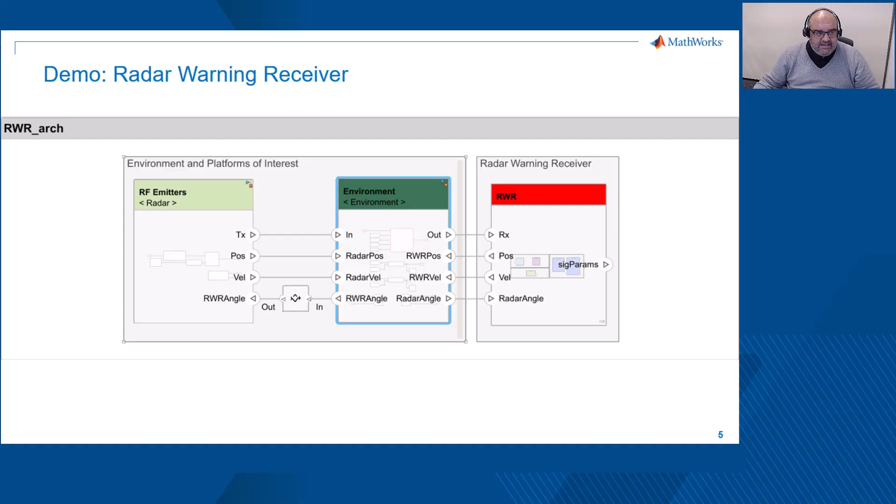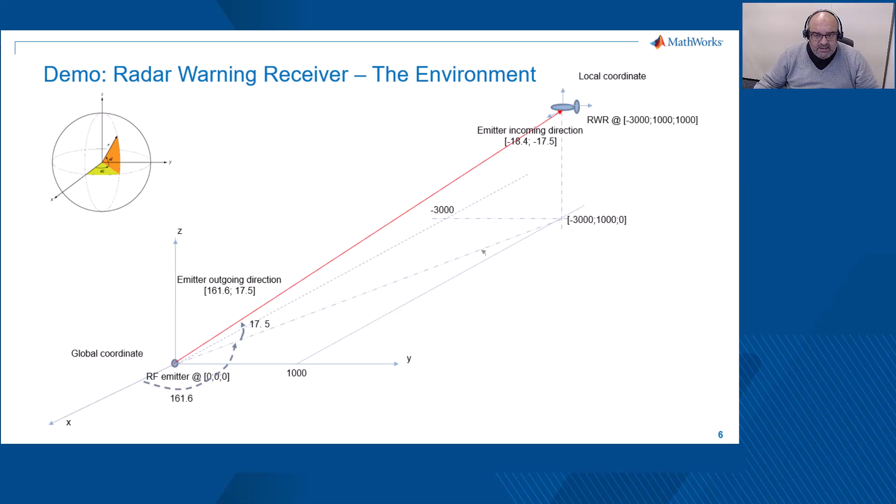As mentioned before, the radar warning receiver is located in a flying platform at an altitude of 1000 meters, located 3000 meters away in the x direction, 1000 meters in altitude, and 1000 in the y direction. Therefore, the relative azimuth and elevation angles in the initial position between the radar and the warning receiver are minus 18.4 and minus 17.5 respectively, and the distance is approximately 3,317 meters.

On the other hand, the radar warning receiver is made up of a receive array formed by a uniform rectangular array of 10 by 10 isotropic antennas, separated by half of lambda. The RF front end in our design just specifies that the noise level of this receiver is 2.5 microwatts.

The motion of the radar warning receiver, which moves only in the x direction, has a velocity of 200 meters per second. And again, the initial position is the aforementioned 3000 meters in the x dimension, 1000 meters in elevation, and 1000 meters in the y dimension.

The signal processor is in charge of two functions. First, it detects if there is any signal in the spectrum recorded by the system, which is done by making some subbands, and then the system detects if there are signals and also in which subband. At the same time, the signal processor estimates the direction of arrival, meaning it estimates in which direction the radar is located.

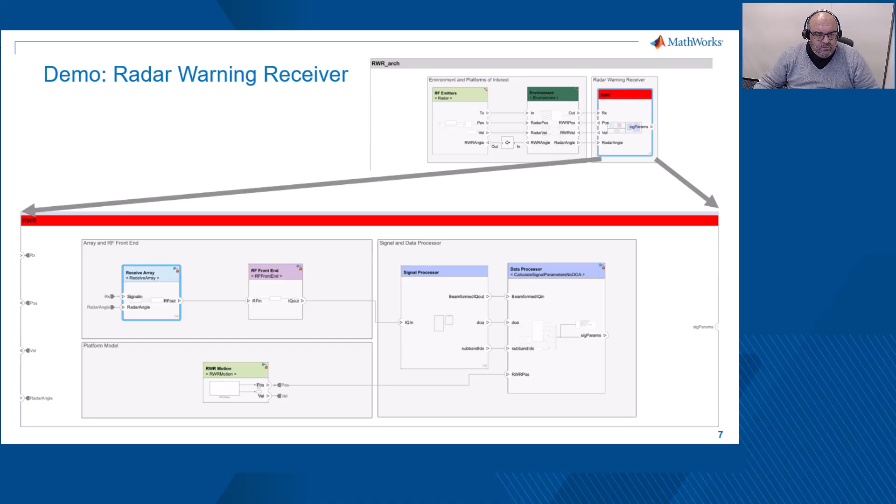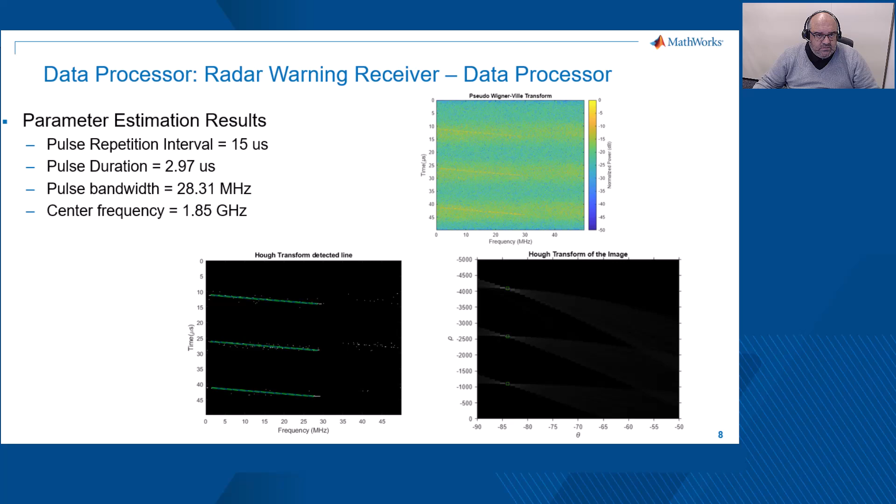But now that we have seen the architecture of the example and how it works, let's see where we are here. Now let's go to the second part of the model, which is called the RF emitters. It is important to emphasize that the radar warning receiver commonly is passive. It's not emitting any kind of electromagnetic signal that could interfere or hamper the detection of the radar warning receiver. Therefore, the RF emitters mean all the active systems which could be working in our environment.

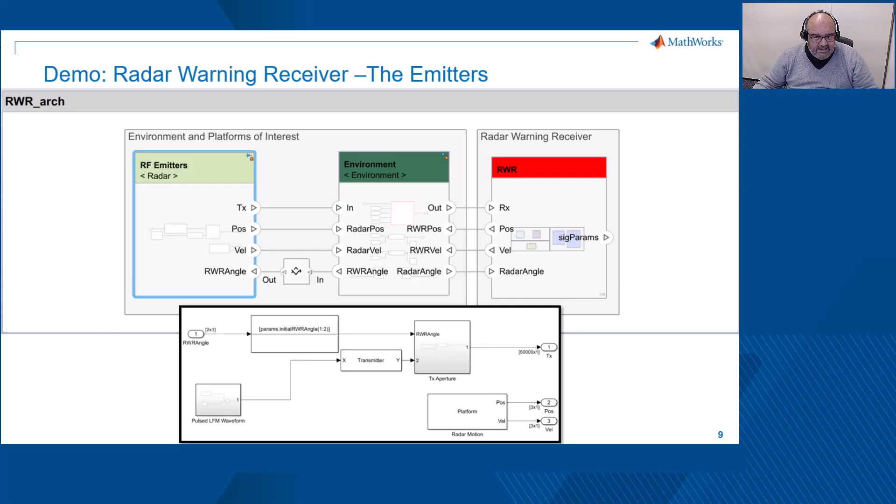In our example it is the pulse LFM radar, whose location is fixed at 0,0,0 and that we are trying to detect. It is convenient to emphasize that, similar to the radar warning receiver, the radar that we are modeling also has a transmitter, which by definition is a simple gain block of 5 dB, and the transmitting array, which is supposed to be a uniform rectangular array of 8 by 8 isotropic elements separated by half lambda between them. Till this moment, all that we have seen is the model of our radar warning receiver system, together with the environment and our radar system trying to detect the flying platform.

Everything is inside of our tool called Simulink, which I would like to explain to all my customers is the glue that allows all the others to be simulated and to be together, sharing info and making simulations of the end-to-end system. It is in this environment in Simulink that you can simulate your system before moving to hardware, optimizing the design and resources even before having to buy a simple cable.

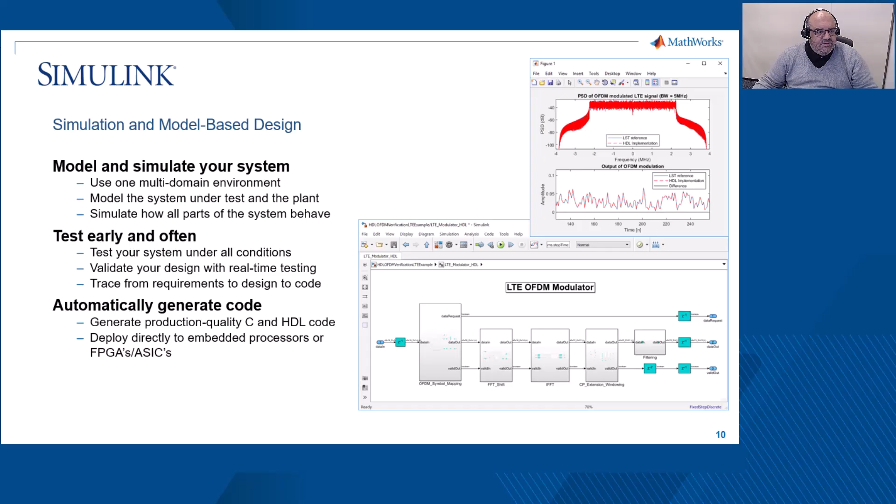My advice is to explore and implement a lot in this environment. Even try designs that you wouldn't otherwise consider, all without having to buy anything, or write any single line of C, C++ code or HDL code, and just gain all the insights that you can from your system.

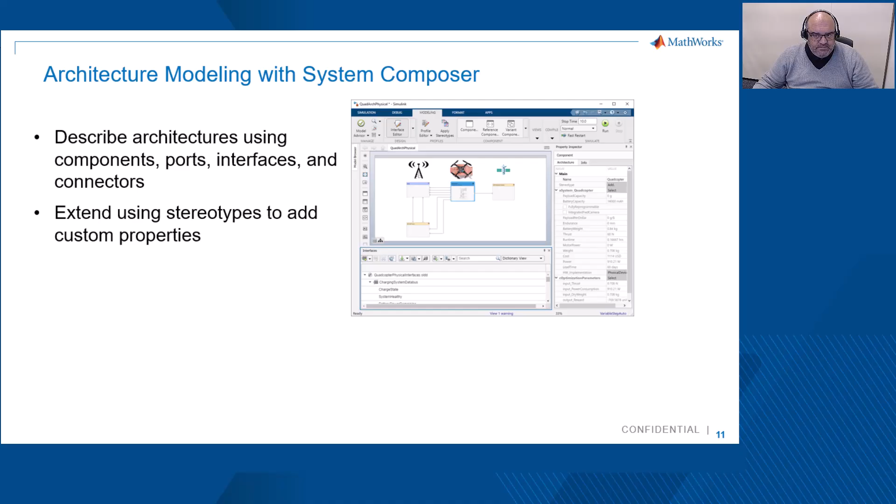On top of the Simulink environment, what we have used to model the architecture is the System Composer tool. You can describe how your system is built up by components and their interconnections through ports, interfaces, and connectors. Moreover, you can also unveil advanced functionalities like advanced views or filter components by defining stereotypes.

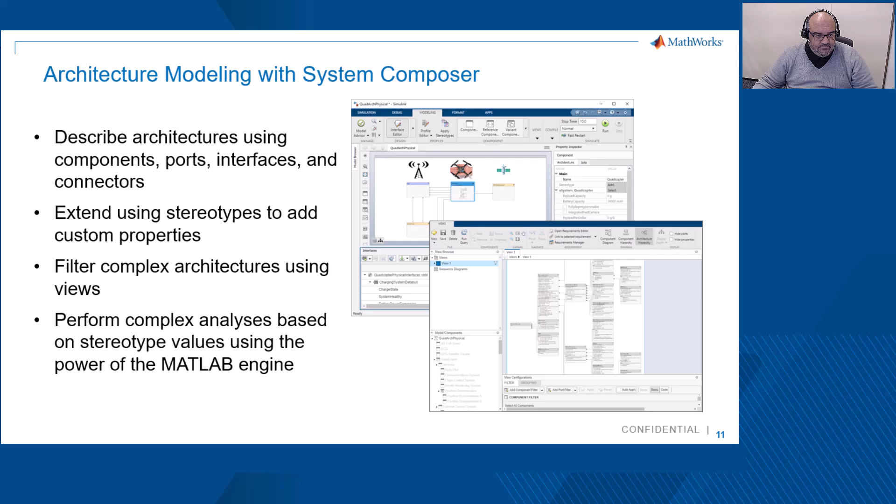We have seen now the architecture and the design, but commonly, the first step of any project is the requirements. What happens with the requirements? Here we do have the requirements in our structure.

Requirements typically come from tools like Word, Excel, or more specialized requirements management environments like DOORS or Polarion, for example. Implementing these requirements in model-based design could be tiring using different environments for each part of the project. To work with the requirements directly in Simulink, there is an import operation from Word, Excel, DOORS, and also for

the standard ReqIF, which is the Requirements Interchange Format, which are XML files. This one is supported by most of the requirements management tools. If the requirements change at source, an update operation synchronizes the changes.

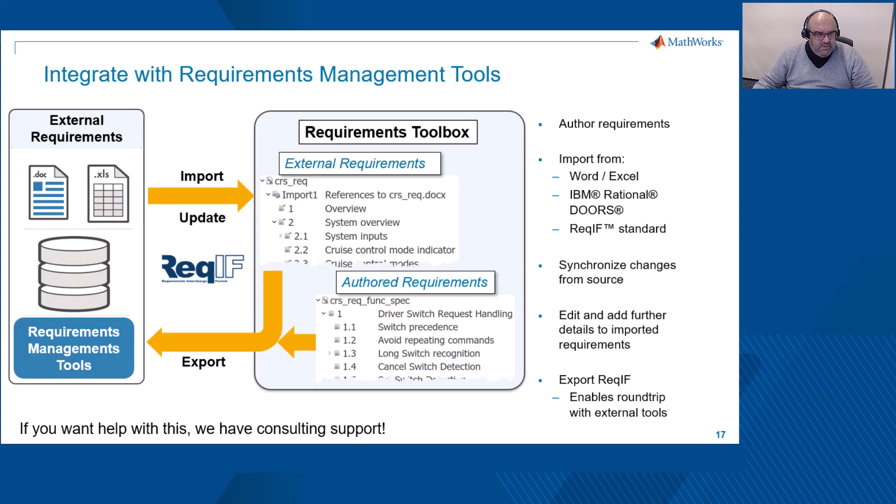Usually the default is to treat the external requirements as read-only, but we can also modify the requirements or add more details, for example custom attributes, and then re-export. In addition to requirements imported from outside, you can also create requirements in Simulink. And finally, as I said before, export the requirements via the ReqIF standard. Let's have a look at the video demonstration about how this is done.

So here, the first thing is that we will open the System Composer app. When we open System Composer, first is to arrange the windows in the way that we want and feel comfortable. It's absolutely personal what windows you would like to see and how. You can just arrange them the way that you like. Once you have the display set up, start creating the blocks.

Creating the blocks, putting the names, and creating all the ones that you would like for our system. In this case, we are seeing a video of a possible radar system that could be used in our environment. There are different parts created, like power, radar, targets and environment, and also comms link and command center. Each of them has its own functionality, and they will have their own properties, their own connectors, inputs and outputs.

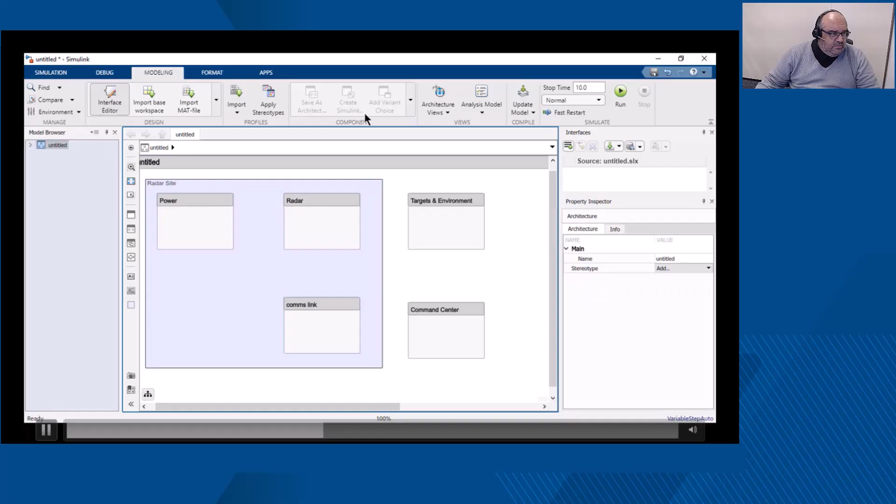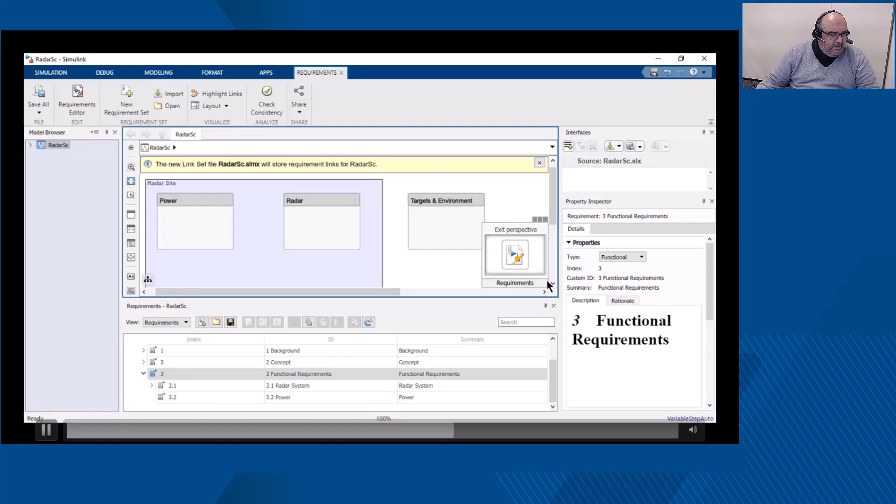Here we are also creating areas in which we can engulf parts, and then we are going to link the requirements to specific blocks of this System Composer creation. We have selected the Word document in which the requirements are specified. Here we are linking to that one, and we have the list of the requirements. We could go one by one, or in our case, we will select some of them to be joined directly to specific blocks.

For example, for the power, we have the 3.2 requirement. Then we link directly to the power block. And then we have the possibility to show it, to see what the requirement is. And we will see later how to link to tests. In this way, we can link all the rest of the requirements. It could be environmental, linked to target and environment. It could also be functional, like the radar system, in which we specify the maximum unambiguous range. That can be linked to a specific part inside the radar, or also to other blocks like targets and environment.

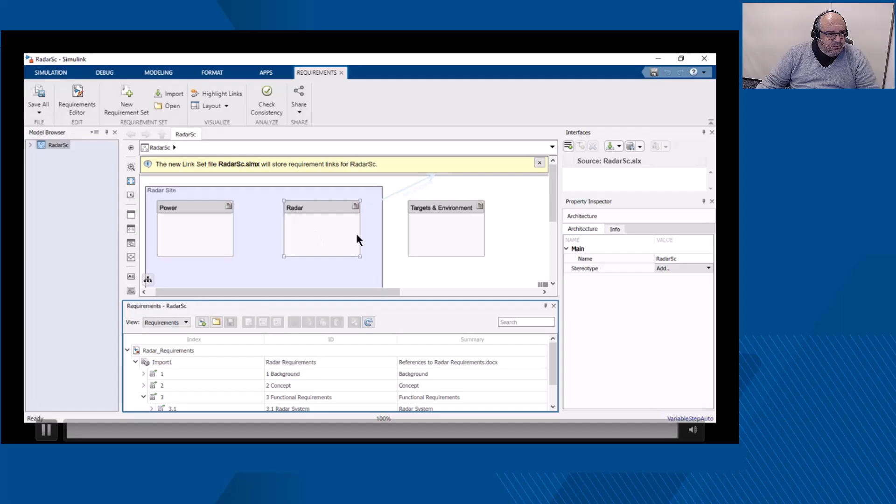The most important thing here is that we are linking the requirements directly to the specific blocks and to a specific design, because as we will see later, inside these blocks we will have the models that each person of the team will populate. What I mean is that inside the radar block we will have a transmit array, we will have a receiver chain, and those will be populated by the person or teams in charge of each part.

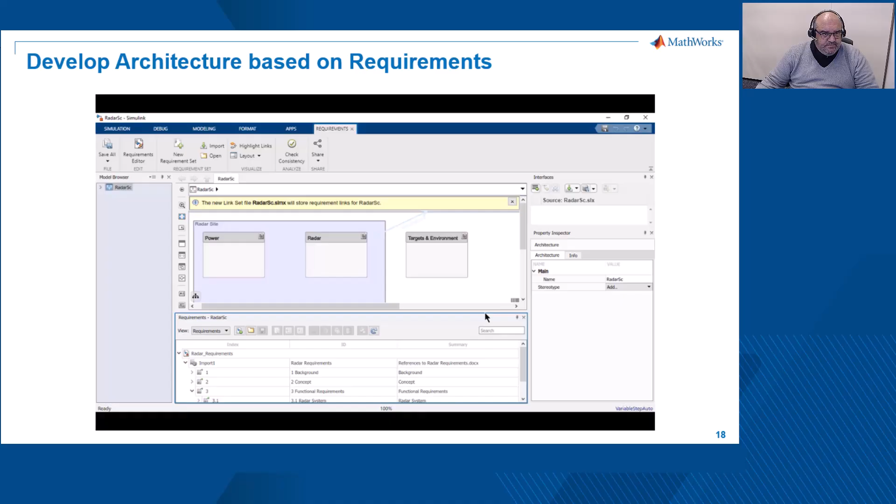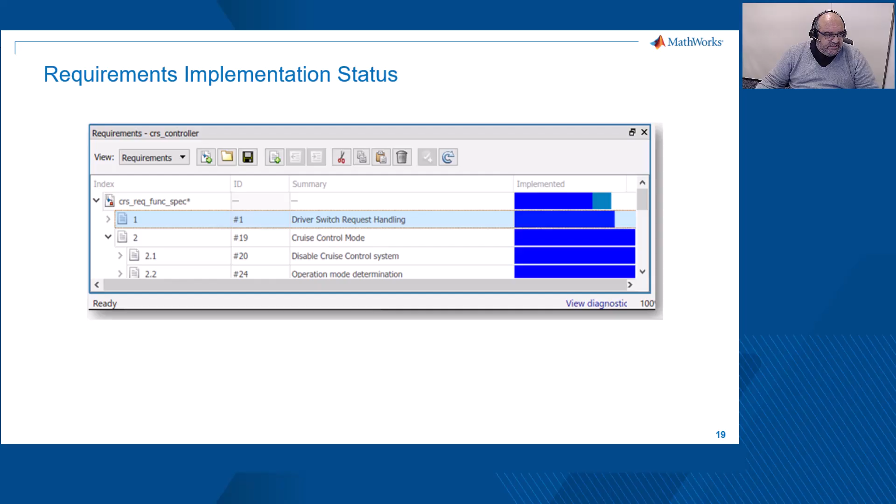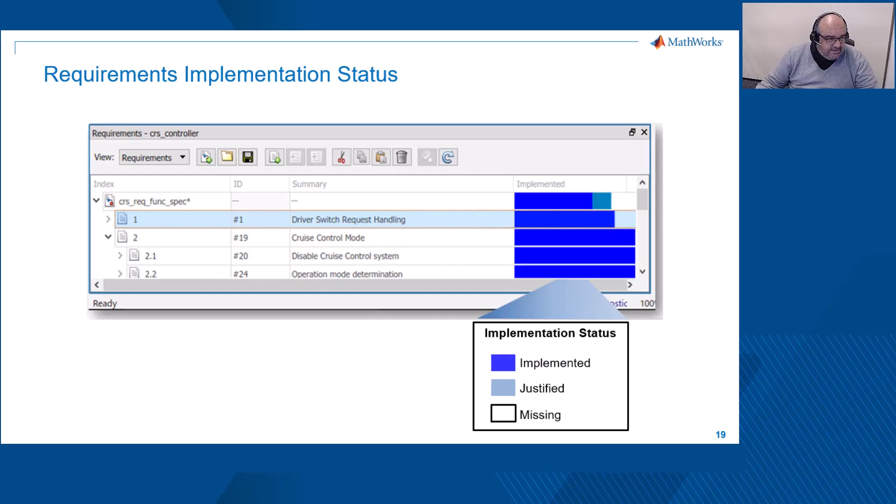Moreover, once we have done the requirements, we have the possibility to check the implementation status. What does it mean? It means that we can check visually, as we see in the image on the slide, for each of them whether they are implemented, justified, or missing. Missing means that they are not linked to any part of the System Composer model. Implemented if they are linked and also simulated, and justified if they are linked but not simulated.

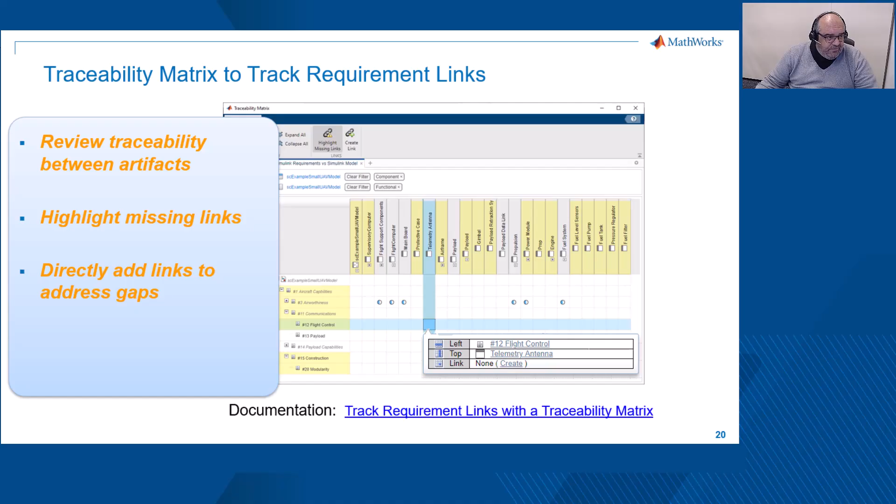Therefore, we can, for example, highlight missing links, such as a missing link between requirements and functional models. Directly with this, we can add links, address gaps very easily, and inform the person who should manage or fulfill those gaps.

At the same time, these matrices can be enormously big, formed of hundreds or even thousands of requirements, and as big as hundreds of thousands of models. Therefore, this matrix view can also be filtered to manage large sets of these elements when you have to manage many of them.

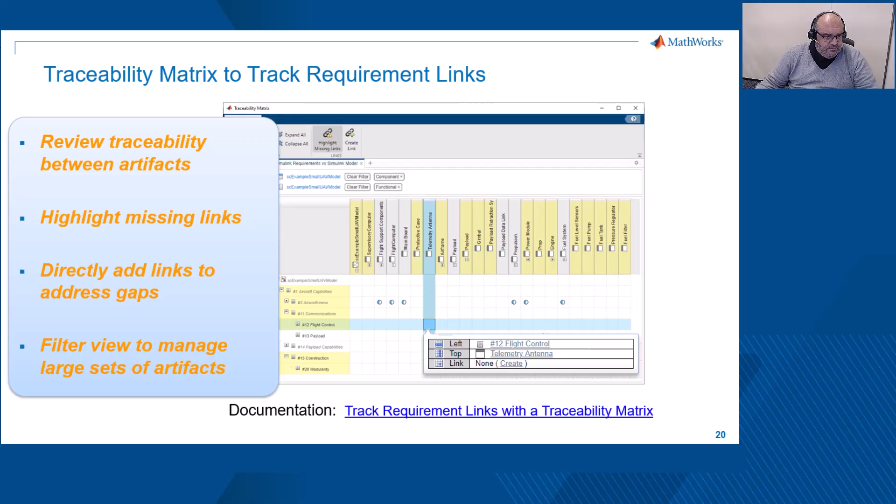But now, we have seen before the requirements, the functionality, the architecture and the design. But let me come back, and I would like to go slightly more in detail to highlight that there are several tools that can be used in our example to do the design process. Again, I would like to emphasize that the design phase means that we will populate each of the blocks of the System Composer model. That is what we can do during this design phase with modeling and simulation.

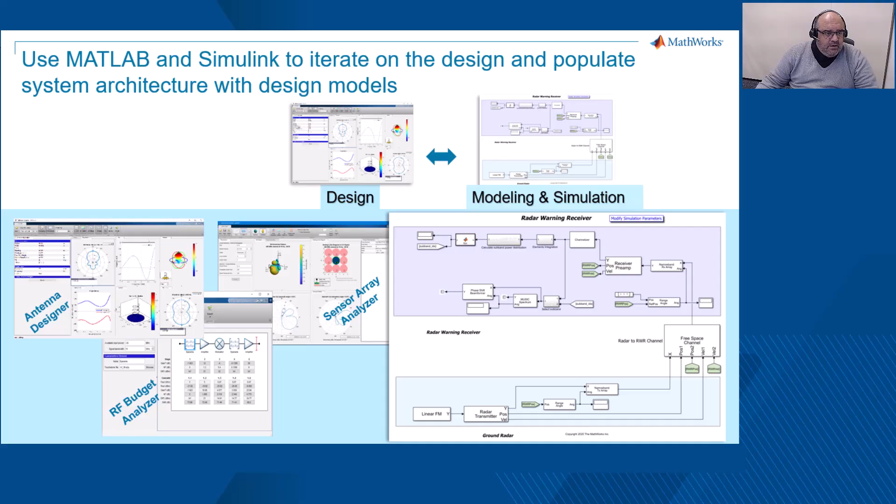But again, for doing that, we have many tools, and we are going to explain some of them right now, how they can be interconnected and how they can be used in order to populate those models in a very simple, straightforward workflow. What we are going to do right now is see a video of how to produce those specific models. In our case, we will start using the RF Budget Analyzer app. This tool is intended for simulating cascades of RF chains.

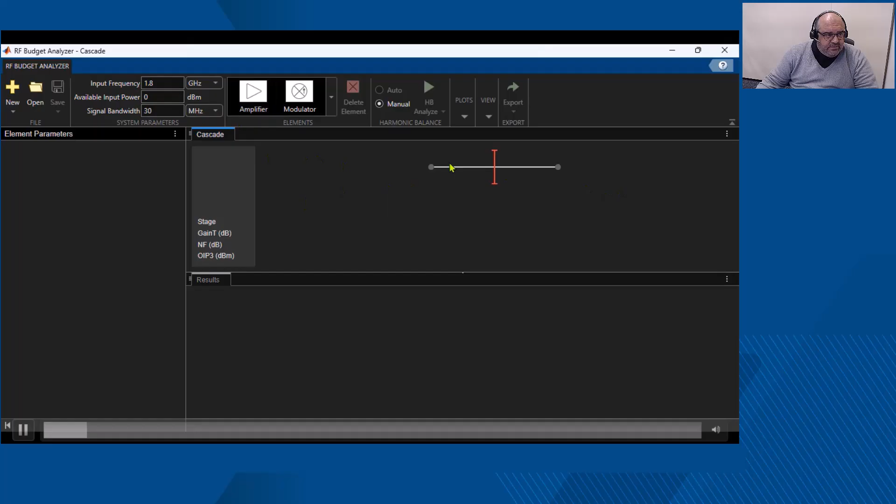The first part of the simulation is we go to the system parameters section in the upper left, in which you have to define the input frequency, the available input power, and the signal bandwidth. Because we are trying to replicate the transmitter of the radar, the input frequency will be 1.8 gigahertz. For the available input power, let's assume we have the modulated signal with a power of 0 dBm, and the signal bandwidth, as we have specified, is 30 megahertz.

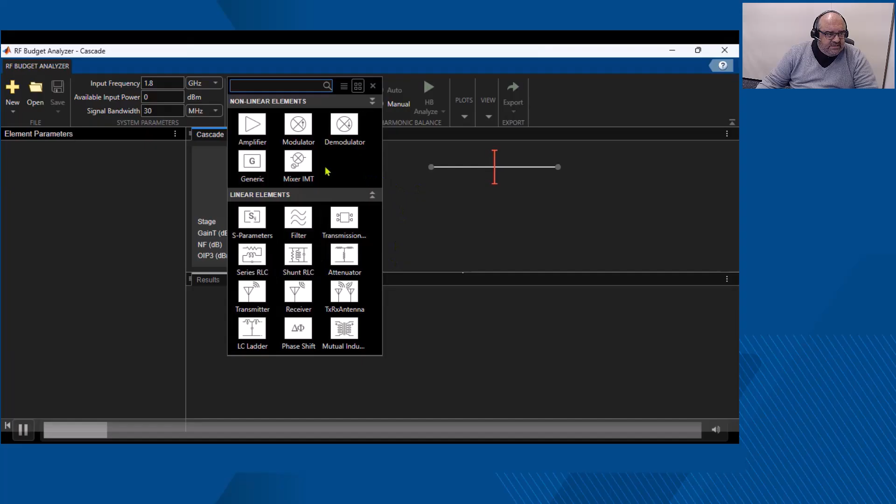Then we can populate the system with different blocks. The blocks that we can insert, as you see here, are nonlinear elements like amplifiers and mixers, and linear elements like filters, transmitters, or antennas, or even S-parameter blocks. In our case, we are going to start with a simple filter after the signal generation. Better, to also include the mixer in our design, we set the input frequency so that we generate the signal in baseband. So instead of 1.8 gigahertz it is 0, the initial modulation.

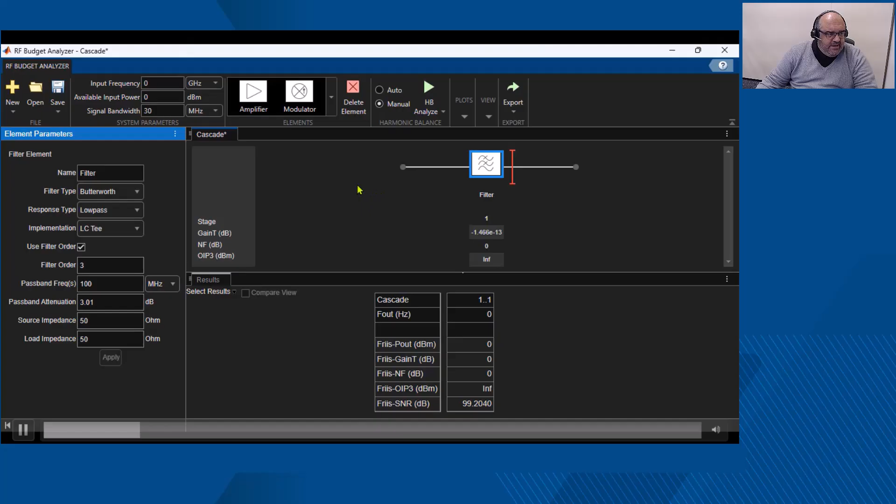Then the filter: for each of the blocks, when it's selected, you have on the left part the parameters of the element. For the filter, the filter type is Butterworth, it's a low pass, with an LC Tee implementation structure of order 3. Let's assume the passband frequency is 100 megahertz. We make the passband attenuation 3 dB, and then we have already designed the filter, and it's included. The second element is going to be an amplifier.

Let's assume the available power gain is 7.5 dB, and that's done for the amplifier. The third element of our cascade after the amplifier is to go up in frequency, the up modulator. We assume it has losses and is not active, so we put minus 6 dB, or 6 dB of losses. More important is the LO frequency: because we start at 0 and we want to transmit at 1.8 gigahertz, the local oscillator will be at 1.8 gigahertz. The converter type is up, and the input and output impedances are 50 ohms.

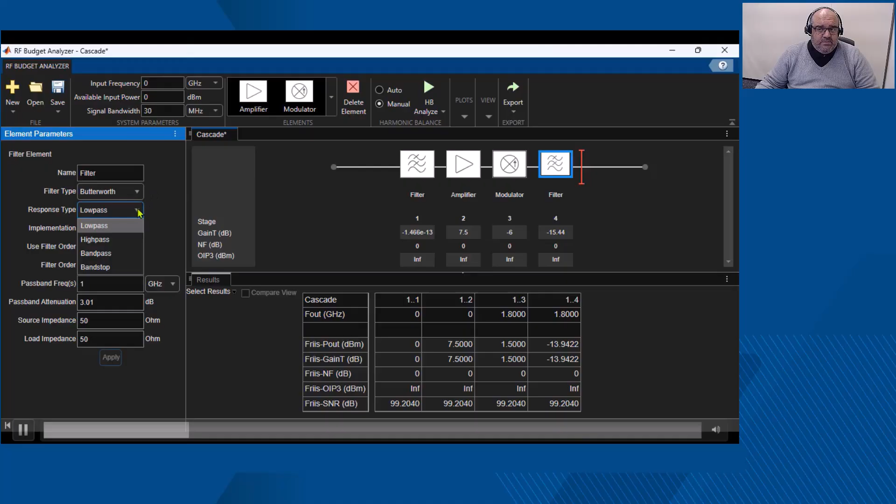After a mixer, generally speaking, we have to first put a filter. Why? To filter out all the possible spurious signals that the system could generate. Right now our filter is a bandpass filter, because we are already at 1.8 gigas, and therefore we specify the passband frequencies at 1 and 3 with an attenuation of 3 dB. So it's not very selective, but at least it's the first filter after the mixer.

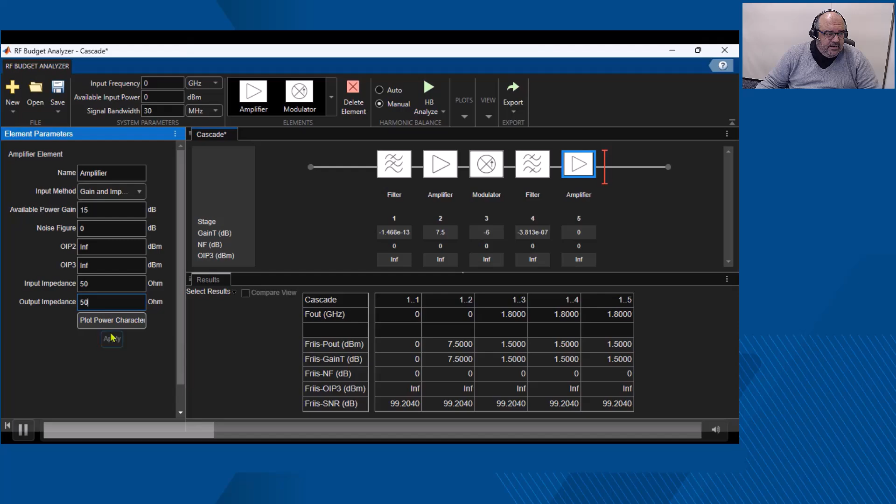We can put a second amplifier with partial gain or medium gain of 15 dBs. Then after that, another filter, and right now we can go very selective in frequency. What I commonly do is a bandpass of a higher order, and therefore try to be more selective. Although here I am selecting the same passband frequencies, commonly here we can be much narrower.

And then finally the final power amplifier, which would be one amplifier that has very high output power capabilities with a reduced available power gain, commonly right now 7.5 dBs. With that, we have all our transmitter chain for the radar, and we have the results there. The total output power right now is 24 dBm of transmitted power calculated by Friis, and the output frequency is 1.8. Those would be the capabilities of our transmitter that we could specify for our environment and our system.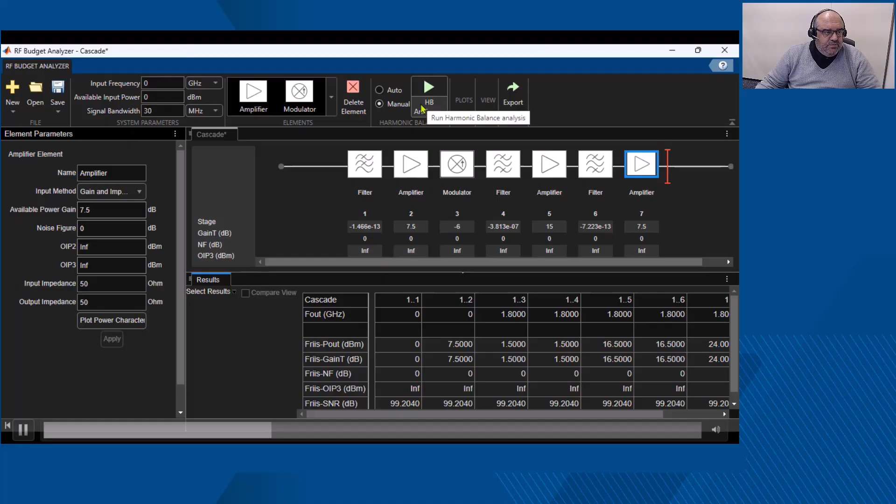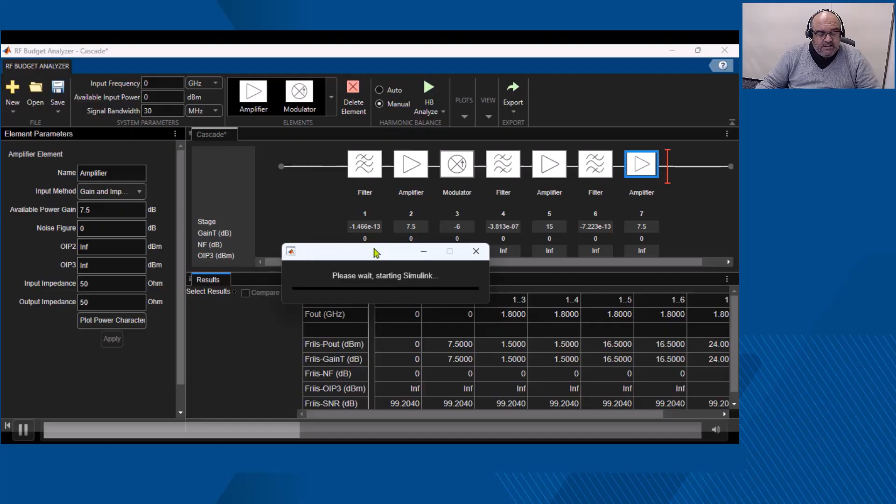It's also important to mention that we can calculate the results not only by Friis equations but also by harmonic balance. And finally, the most important part is the export tab. In the export tab, we can select one of the options, that is RF Blockset. When we select that, the system automatically opens Simulink, and it will create for us directly from this cascade design the Simulink equivalent model of this transmitter. And that is very, very important because it gives you a lot of things already done.

Here you can see the block for you. You have all the blocks there with all the info that comes from the RF Budget app, but also the configuration of the simulations, the input ports and the output ports, which is also very important to have already configured for you directly, because if not, it adds complexity and difficulty for simulating the models.

But in this model, there is something missing: the antenna. We can open an antenna block by requesting antenna from the canvas, and the only thing we have to do to include the antenna is to connect the output of the power amplifier to the RF input of our antenna block. That would be enough to include the antenna in our simulation environment. But what kind of antenna? Right now, by default, it is an isotropic radiator.

There are possibilities to make much more complicated antennas, not only specifying the gain here, but also the frequency radiated. There are tools to make the design of antennas much more elaborate. What we're going to see right now is designing one from the Antenna Designer. Directly from the source of the antenna model, we select Antenna Designer and press the Create Antenna button. This will open an app very similar in appearance to the RF Budget app, in which we can start designing our antenna.

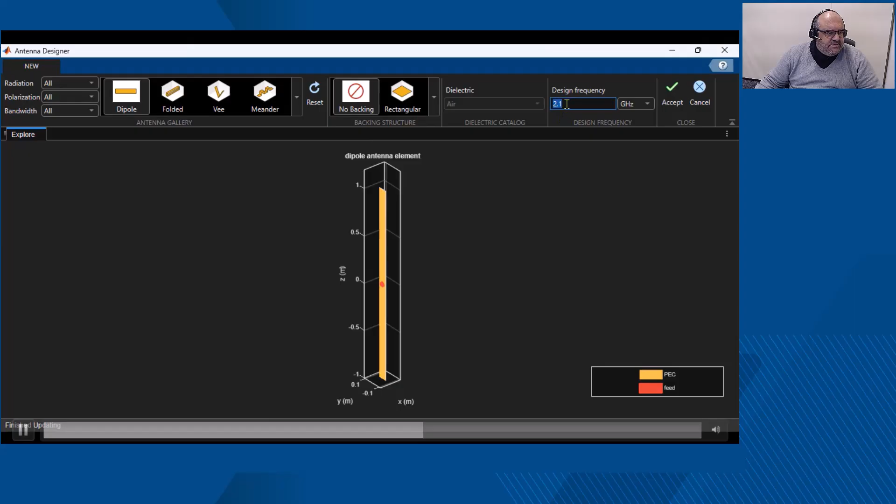We press the New button at the upper left corner, and there we can first select if the antenna has a backing structure: no backing or rectangular. By default, the dipole is selected, but there are many different antennas possible to select. It can be spirals, resonators, patches, around 180 different possible designs to choose from. For simplicity, and just to show capabilities, we will select the dipole, which is a very simple antenna.

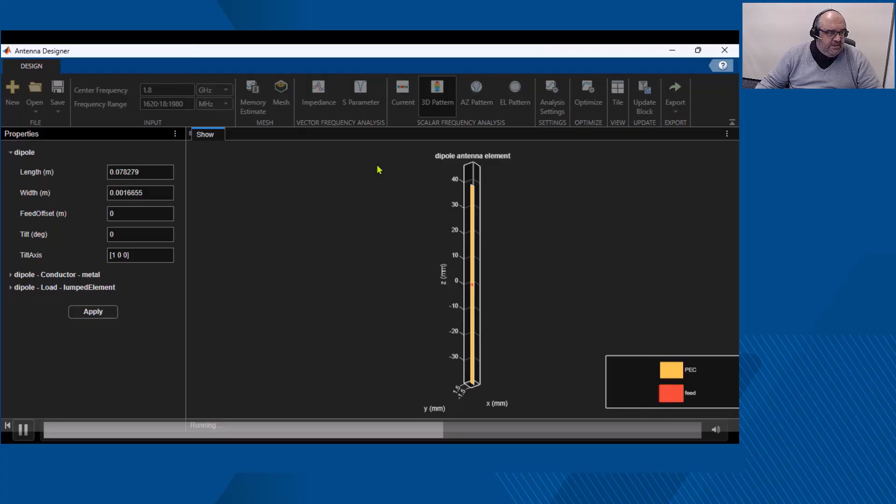The design frequency, as we decided, is 1.8 gigas, and when we accept, the system directly gives you the dimensions of the dipole antenna working at that frequency. The frequency bandwidth, although fixed right now, can be changed by the user. But the most important thing is that we can directly calculate the 3D pattern of that antenna. Here you see the results. We can also calculate the S-parameters. In this case the antenna has only one port, so it will be S11.

And here, for obtaining this, it's important to mention that we have just executed a full wave electromagnetic analysis. We obtained the S parameters, and it is adapted, or the minimum of these parameters is at 1.8 gigahertz, exactly the frequency that we would like.

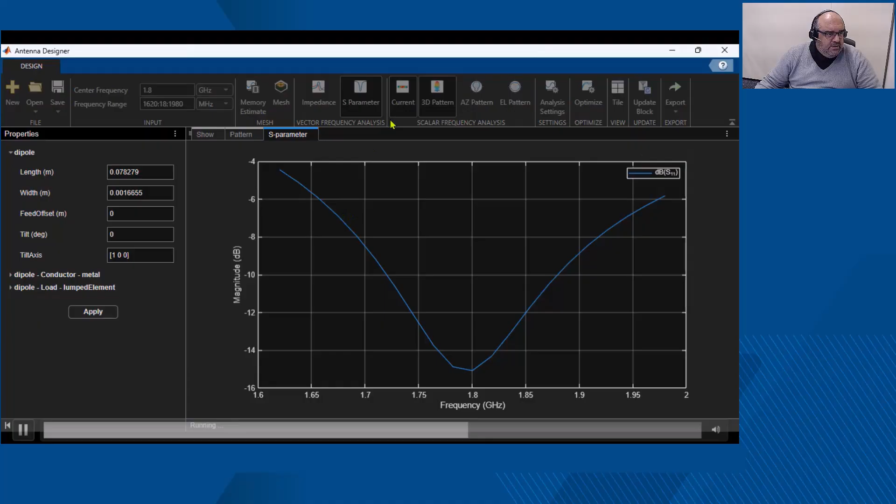Moreover, other results that we can obtain directly from the options are to plot the current distribution of the antenna, and also azimuth and elevation patterns, although here I'm not showing them because we have already seen the 3D characteristics.

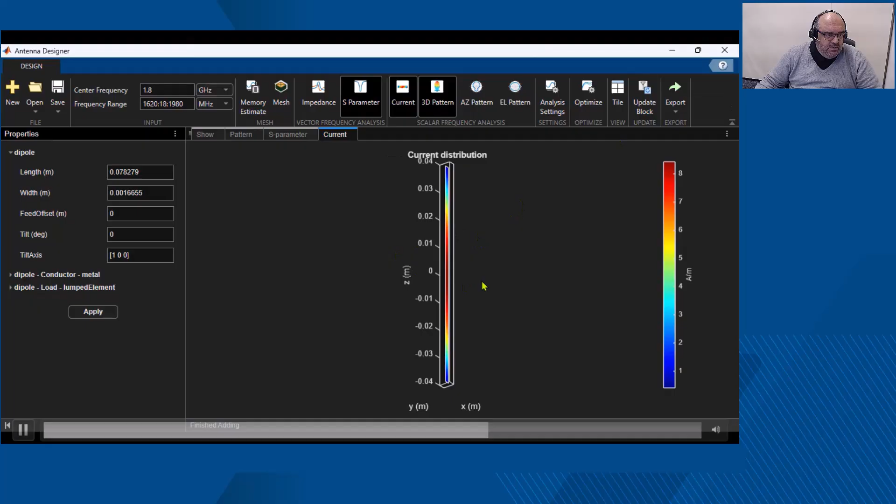Once we have seen all of this, the next step is we can go to update block. When we press the update block option, we can see "update block untitled antenna." That means that this design can be exported directly to the Simulink block of the antenna that we were in before.

When we accept that, we can go back to our design, click on the block, and we can see there our antenna already, our dipole antenna. The only thing that we should do is change the radiated carrier frequency to 1.8 gigahertz, and then also select the direction of departure if it needs to change. And then we have already included one antenna design in our system.

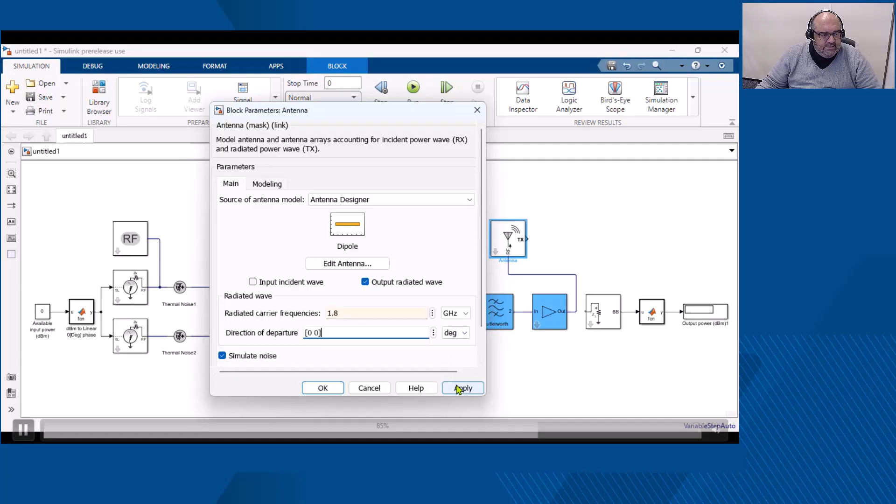Then the problem is that we would like to be able to simulate not only an antenna, but an array antenna. And how can we do that? Well, in that case, it's slightly more complicated because it's not so straightforward directly from the antenna block. To be able to simulate an array, we have to go to MATLAB and open, in the apps section, the Antenna Array Designer.

When we open that app, we will see that it is very similar to the antenna one. Therefore, what we have to do first is select new design. When we select new design, we will see that we have first whether we would like a structure or not, what kind of antenna, but also in the upper left whether our array is linear, rectangular, or there are many other possibilities.

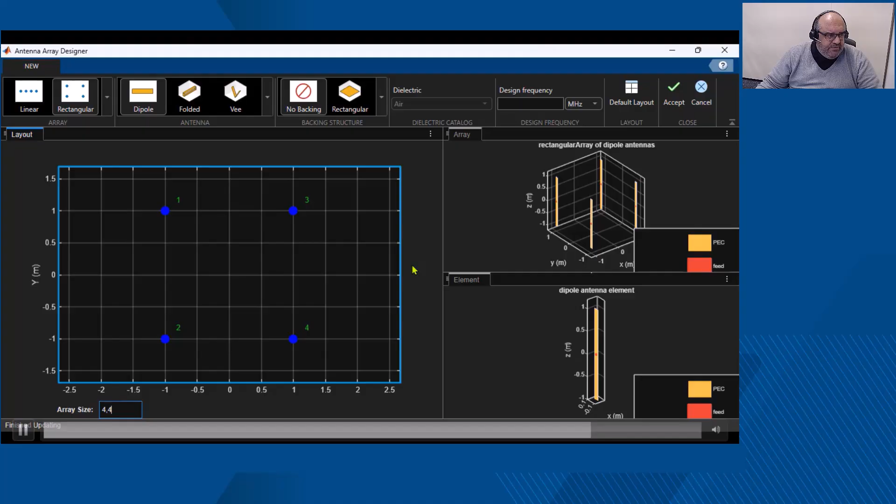In our case, we said that the radar has an array antenna of 8 by 8, but for simplicity, and also for simulation timing, let's assume right now a 4 by 4. Then we implement a 4 by 4 one, and now we can see the array in the array geometry. Of course, by default with dipoles, because that's the one we said we would like to use, and the design frequency is 1800 megahertz, and then we accept the design.

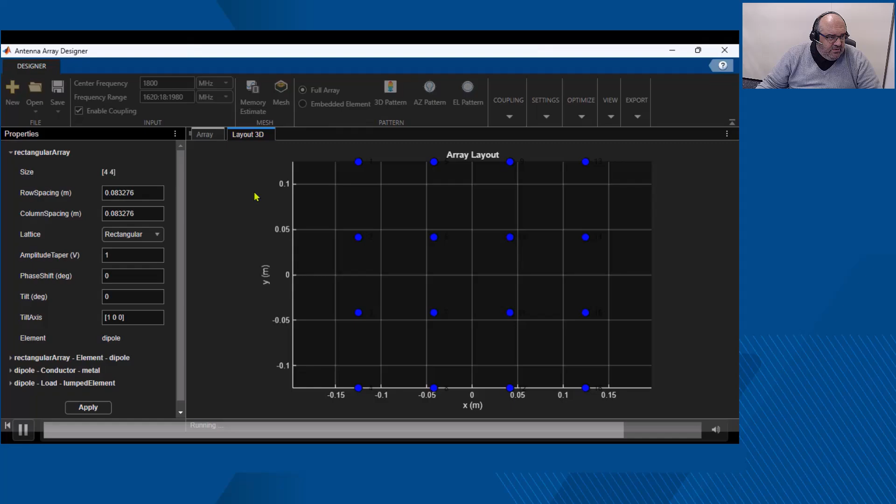Once we accept the design, again we have the array layout in 3D on our screen, and then we would like to simulate the radiation pattern. The 3D radiation pattern we can obtain again by clicking on 3D pattern, and here we have the result. It would also be feasible to obtain the S parameters, but it's slightly lengthy, and therefore we would like not to use too much time.

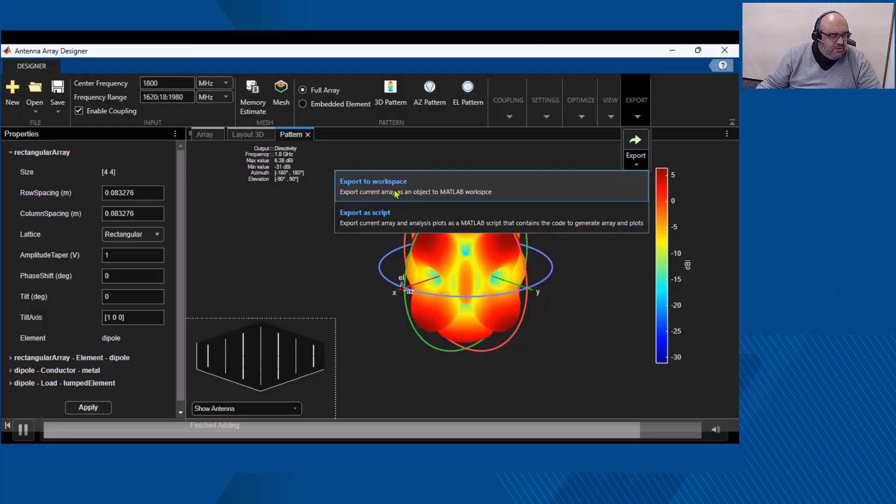Finally, in order to include this design in our Simulink environment, we export this design as a variable in the workspace. We save it as a rectangular array variable, and then to include it in our design we go back to the antenna model, and instead of selecting antenna designer as a source, we select antenna object.

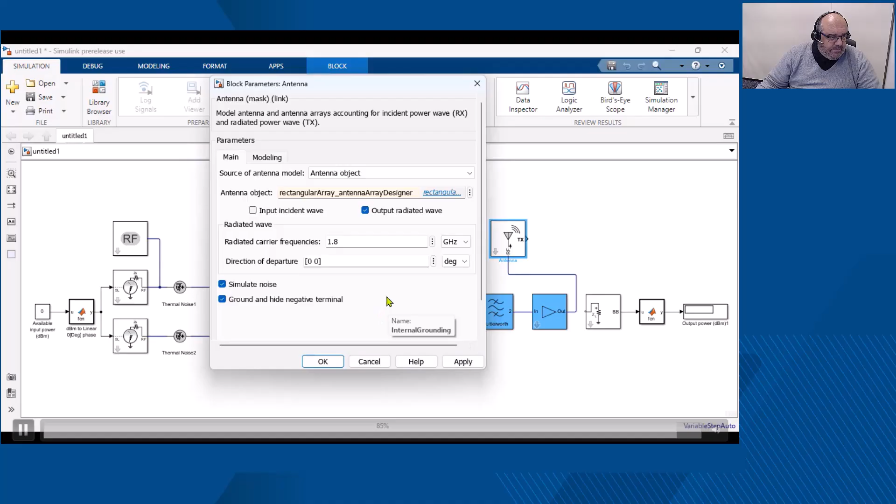And now at the antenna object we have to know the name of the variable. Remember, it's a rectangular array, so just place the first letters. Here we have the variable in our workspace. Then we apply, we accept, and we press OK. When we press apply and OK, we will see that immediately the antenna block has changed to an array that has as many inputs as the number of elements.

Therefore, the only thing we have to do to completely design our MIMO system is to copy and paste the transmitter as many times as needed and connect it to each of the inputs of the antenna. And then we will already have the simulation of our transmitter from the radar.

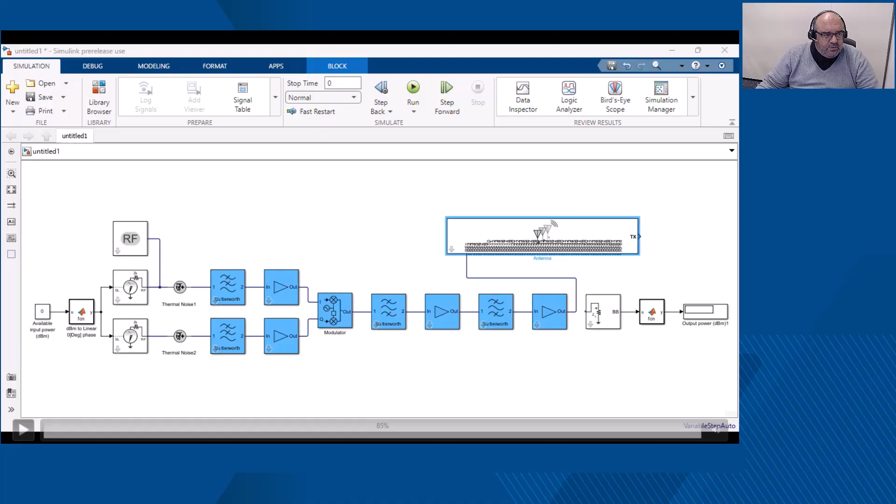That is exactly what I wanted to show you from these tools, because what I would like to emphasize is that you can use this model to populate directly the blocks from the System Composer that I was showing before for the overall system. In the same way, not only the radar, but also the radar warning receiver. And in that sense, by simulating the System Composer, in the end you will also simulate these kinds of systems.

So, following to the next slide, how complex can these systems be? They can be as complex as this one, for example, another design in which you have not only filters and amplifiers, you have phase shifters, you have also switches, you have also capability about deciding where to change the switches. Also, you have power dividers, you have matching networks in order to be able to match the power amplifiers towards the antennas.

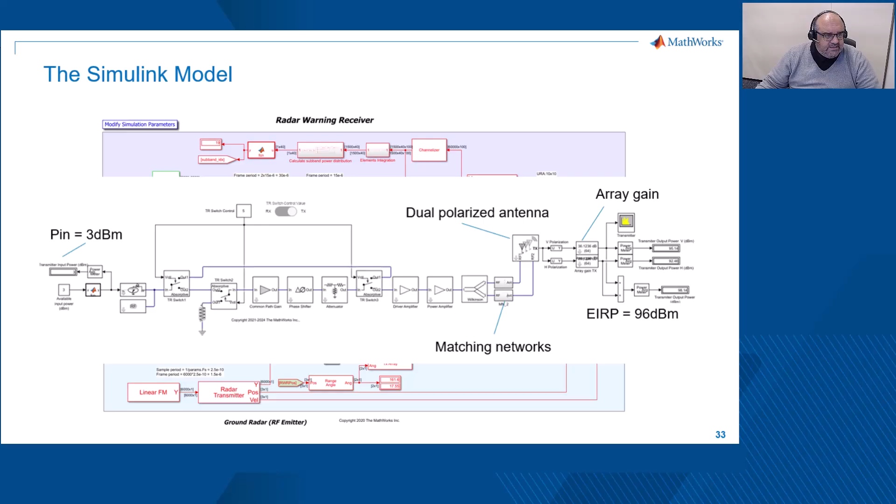So therefore, what I would like to tell you is that those models can be extremely complex. You can even take into account the polarization of the antenna. Also, you can manage to transmit and to receive multiple signals at the same time, for example, for simulating jammers or for simulating interferences. In the end, what I would like to point out is that the more complicated you make this system, of course, the simulation in System Composer will take longer. And that is something that has to be managed and taken into account.

Well, once we have already checked in detail the design, our next step is the implementation. Implementation means when you would like to deploy some of the algorithms in physical hardware. For deployment, we have got a unique code generation framework that allows models developed in MATLAB to be deployed anywhere without having to rewrite the original model. This gives you the ability to test and deploy the entire system and not just the model itself.

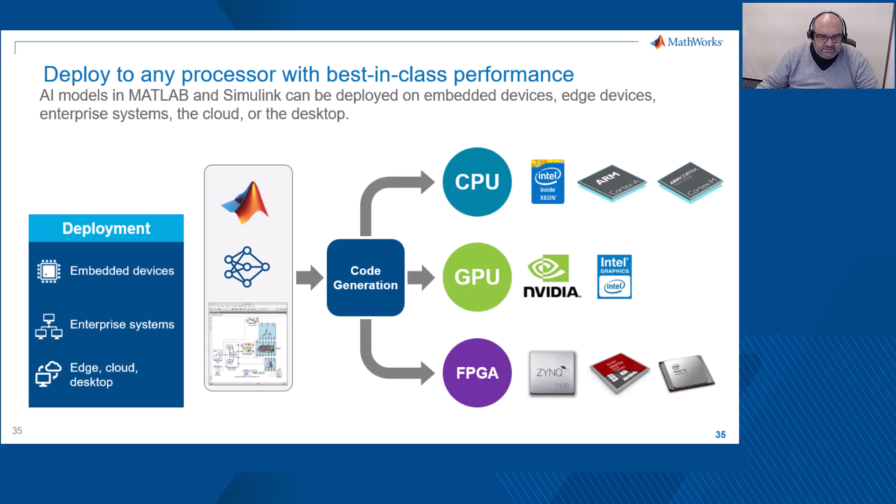MATLAB can generate native optimized code for multiple frameworks. It gives you the flexibility to deploy to lightweight, lower power embedded devices such as those used in a car, low-cost rapid prototyping boards such as Raspberry Pi, edge-based IoT applications such as a sensor and controller on a machine in a factory. It's important to mention that if you would like to speak about FPGA, please come to ask about your interest, because we can help you also with that.

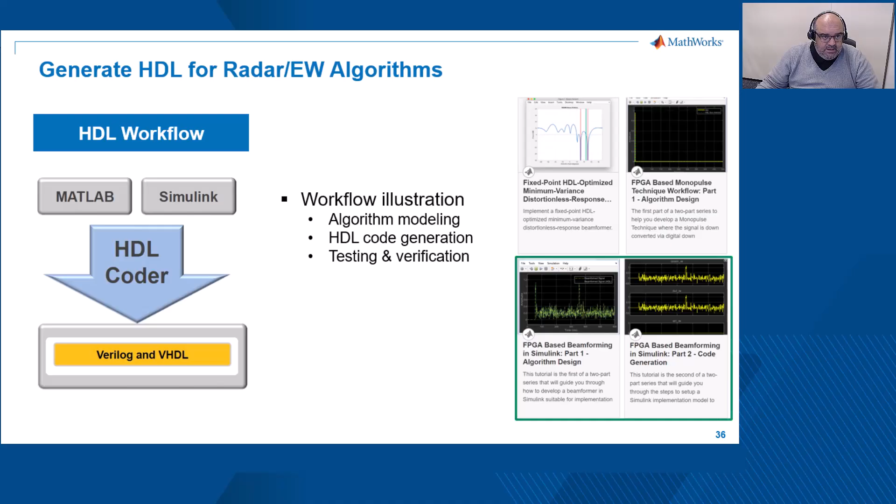In our example specifically, it would be feasible to deploy the Wigner-Ville and the Hough transforms aforementioned to specific hardware, for example, using also HDL Coder. And although it's not the topic of today's webinar, we encourage our attendees, if they are interested in this specific workflow, to contact us. Or please check the multiple examples published on our page which generate HDL code for radar spatial signal processing, beamforming, and also, for example, direction of arrival. And if it's of interest or you need more info, then contact us.

Then the next point I would like to touch on and explain is testing. What happens if we would like to check what our system is capable of? We have right now all our functional model. We have populated all our blocks with our models, and then in System Composer, the user can simulate the complete thing. And we have seen also that we can link the requirements and check if they are fulfilled or not. But testing means to do that automatically.

In this sense, we have the possibility to use Simulink Test, which provides three main capabilities for testing models. A test manager for organizing, executing, and reporting tests and test results. Test harnesses for isolating a component under test and separating your test artifacts from your design artifacts. Multiple test authoring options. In the functional testing process, test cases are authored by reviewing the requirements documents. You can use test sequence and test assessment blocks to create complex test scenarios as well as pass-fail conditions. And for more flexibility in creating tests, you can capture test input in an Excel template and define baseline results using Excel.

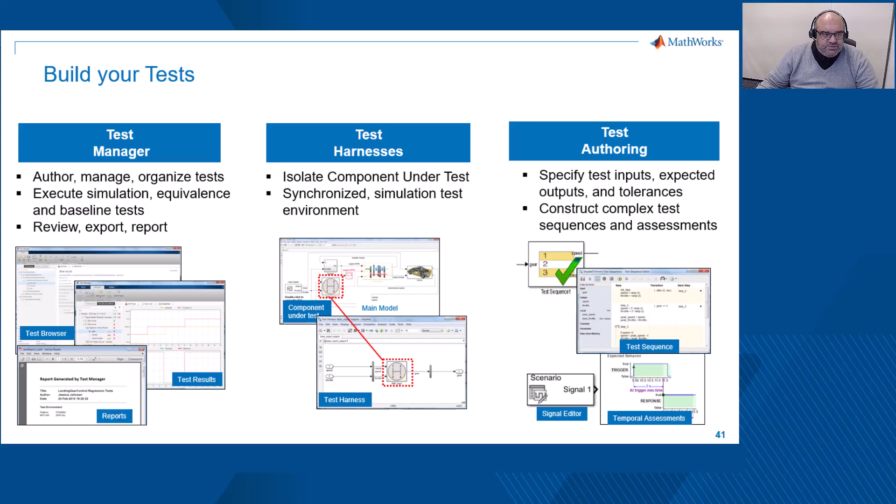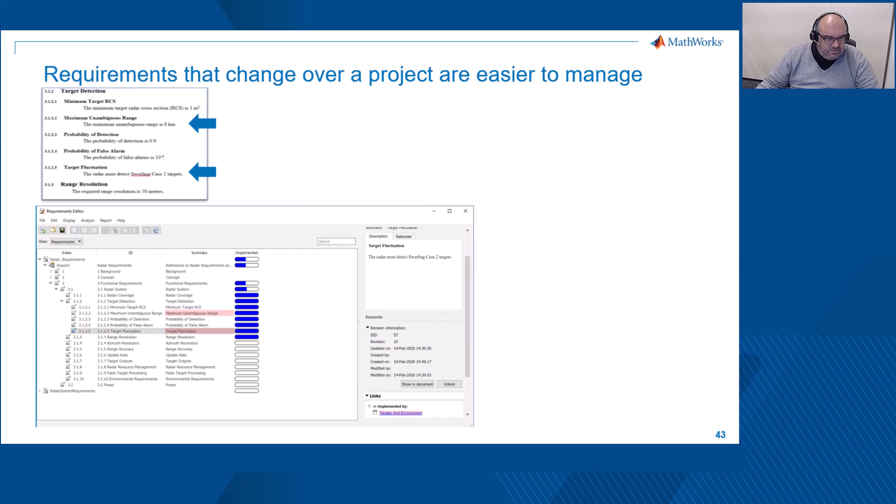In this way, with our tools, requirements that change over a project are easier to manage because they are linked together, and when you, for example, change the Word document, the change will automatically appear in the requirements and also in System Composer. At the same time, not only when the requirements have changed, but also if the test fails.

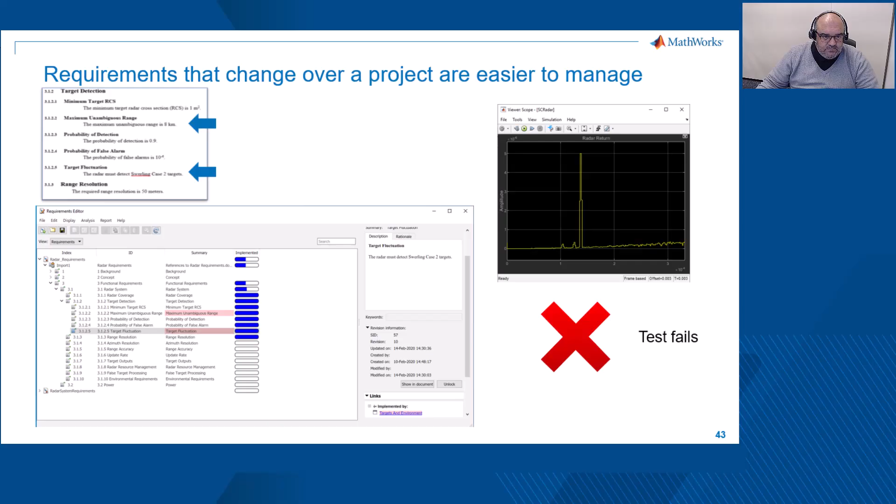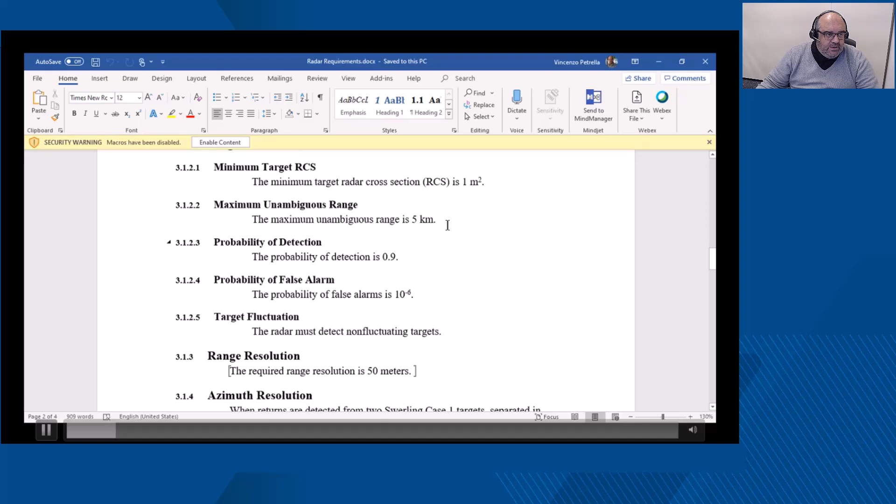For example, we have here a video in which we will see how to handle it if the requirements change. First, we go to the Word document of the requirements and change some of the requirements for the radar. So the maximum unambiguous range can change to 8 kilometers, and the target fluctuation, targets that before had no fluctuation, now changes to Swerling case 2 targets.

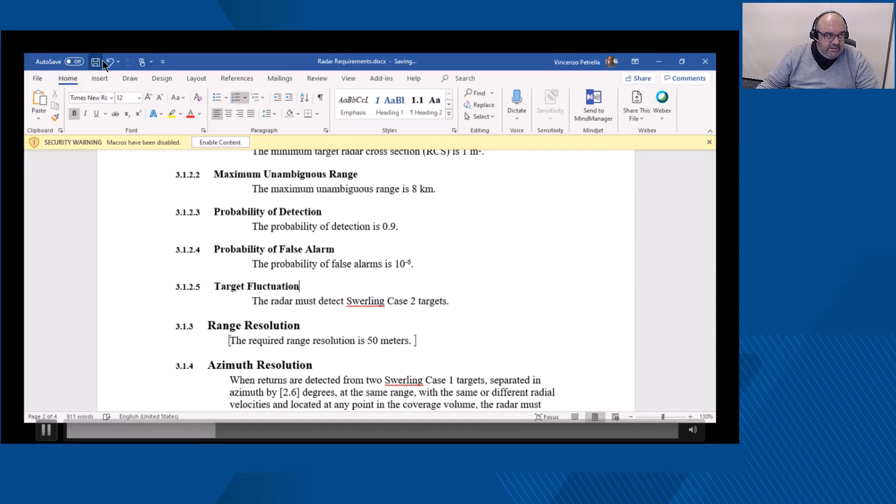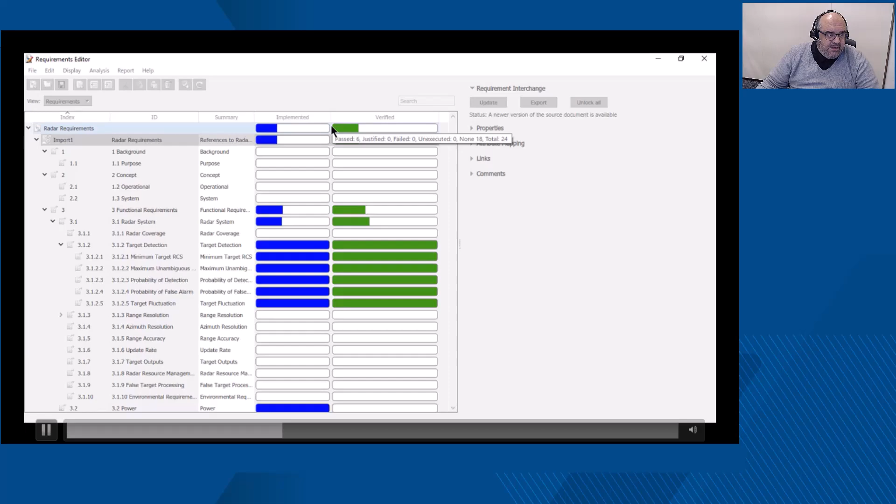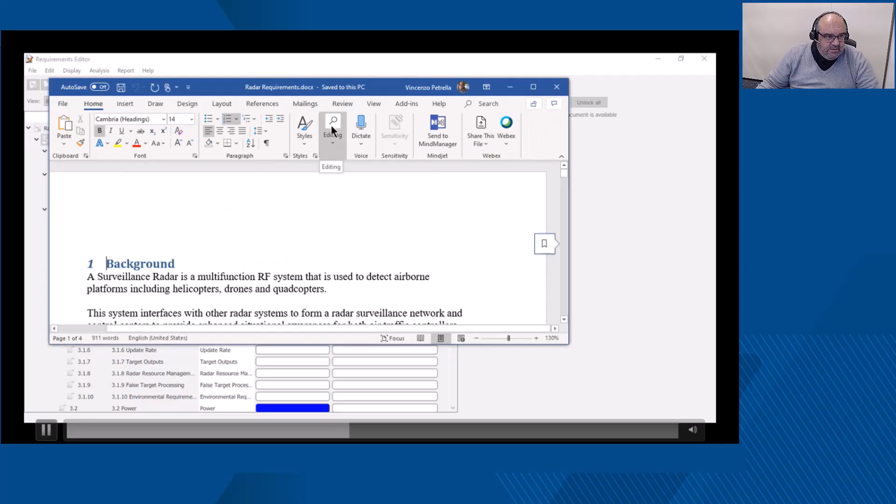Then, when we save that, it goes directly to the Simulink requirements, and we just press update. Then we import the new Word document, and the system realizes that there are changes. Those changes will be highlighted so that the user can very easily be aware of them. When we open all the requirements, we will see that there are two highlighted there which have just changed.

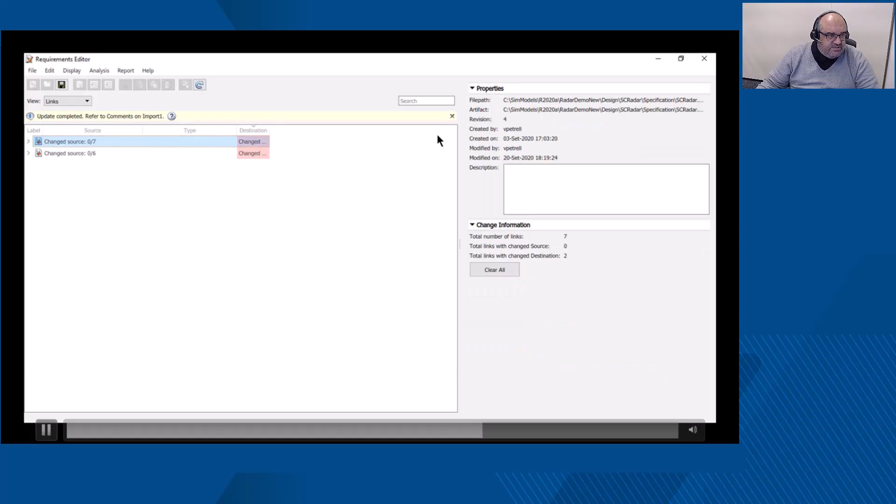And there we can also check by the links exactly what has just changed. Not only the properties but also the change information. And check that right now the requirement has changed and also why. There you have the actual case of the requirement changing.

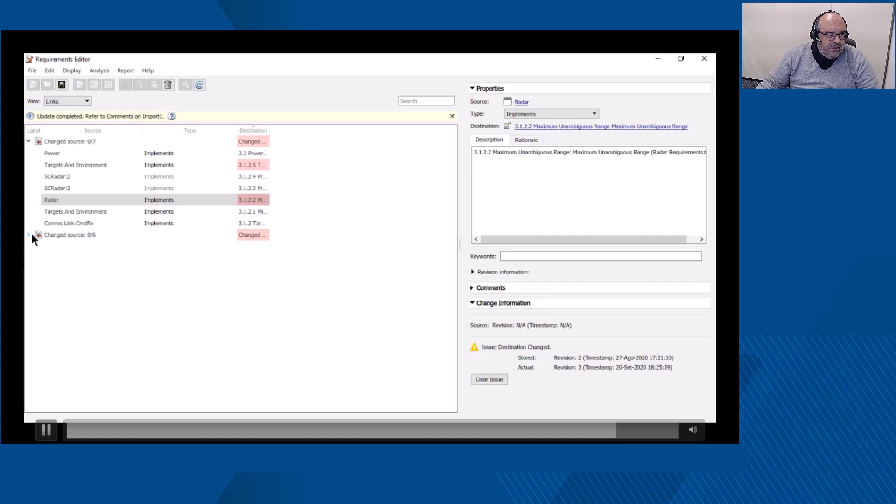Therefore, from this point of view, it also points out which blocks are affected by this change, but not only the blocks, but also the test cases. If the test cases are linked correctly to the blocks, the test cases that need to be redone or re-executed are also highlighted.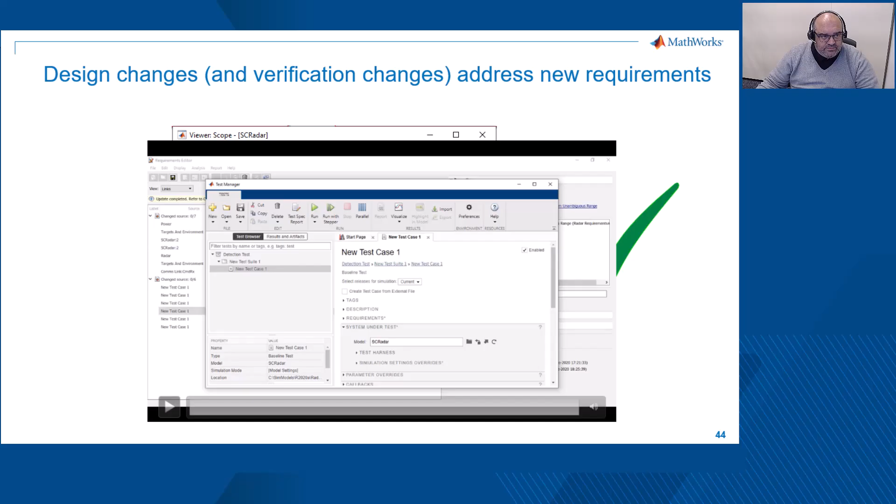That means that here we have finished, except the last point, which is operations and sustainment. It is not the topic of today, but I would like also to tell our attendees that we do have tools to optimize the working period and also the life of the system. How is that possible? Mainly by developing digital twins which can be used for analysis of failures and to counteract them before they even happen.

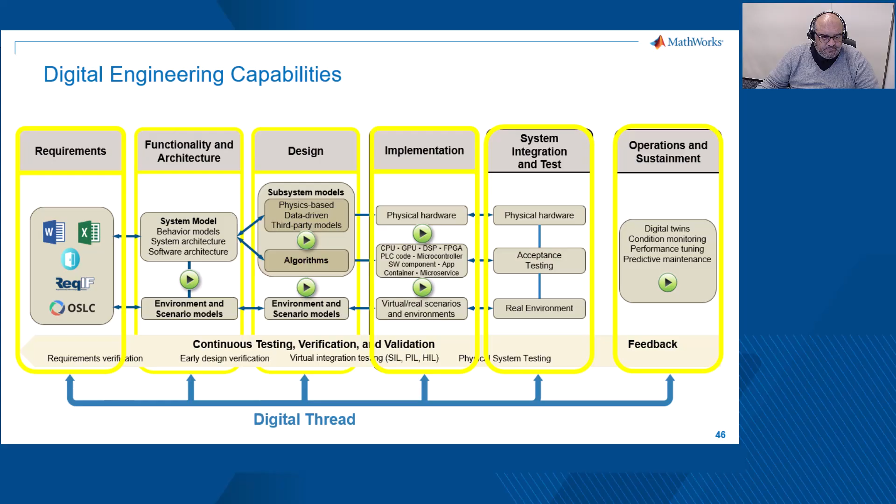Now, just to finalize our presentation, as a summary, what have we seen here today? We started with a set of requirements for developing a radar warning system in a certain environment with also a radar. We gathered those requirements in a document and linked them with a certain architecture developed in System Composer. Each block of that architecture has been populated with the specific design done by a specialist of the team, using different tools but all converging in the Simulink environment and developing models and specific files.

Then all together can be simulated and their performance checked. Therefore, the modeling can be done even before purchasing anything and without the need of a lab. And the simulations can be done in big numbers to analyze different design possibilities, even those that could be out of the scope at the initial stages of the project.

And finally, also testing. We can do those simulations and the tests in an automatic mode, where the performance can be checked, immediately knowing, as we have just seen, which part of the system or the design should be modified or improved in case of non-fulfillment.